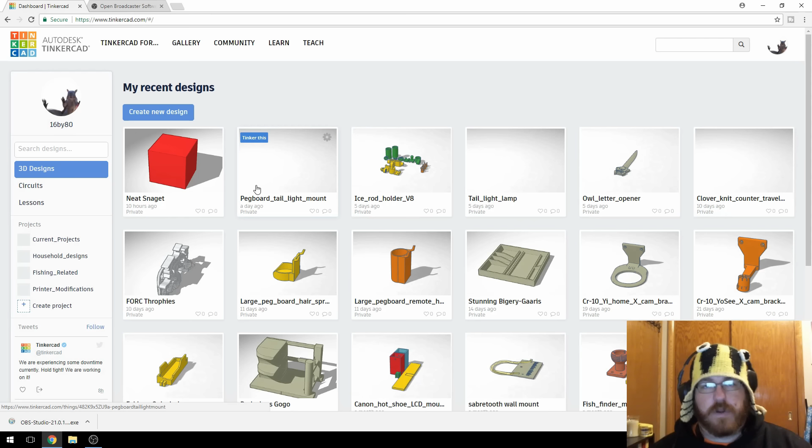What we're first going to do is, I use Fusion 360, but when I started I used TinkerCAD, and I kind of suggest to everybody to use TinkerCAD. It's just easy, it's free, you might as well just use it. You get to set up an account for it, but the account is free, so it doesn't matter. It's through Autodesk, the same company that does Fusion 360 and all that.

So when we get in there, just start a new design. When we're trying to do molds for different things, for me it's for plastisol for making fishing baits, but I guess it applies to anything really that you would need a mold for. This would apply to some other things like CNC as well, if you wanted to make aluminum molds, or aluminium if you're across the pond.

I'm sure there's some limitations to CNC that you would have to take into account that you won't have to do in 3D printing. But there are some in 3D printing that would be a good idea to keep your eye on, to make sure you don't do something that's going to be a little bit more difficult to print and get a good final result with.

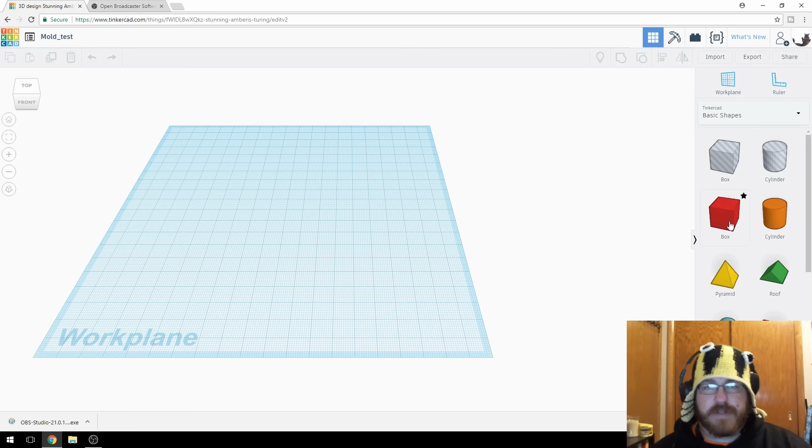In TinkerCAD it always loads with this weird name - it always loads bad in Google Chrome by the way, Firefox seems to be a lot better - so we'll just do like mold test or something. TinkerCAD's a very simple engine, it's just drag and drop, like a Tinker Toy kind of situation, which makes it really, really nice for beginners.

What we're going to do is we want to come up with the design that will eventually be our negative. I don't know really what we want to do here, but I guess we'll just do kind of like a swim bait of some sort.

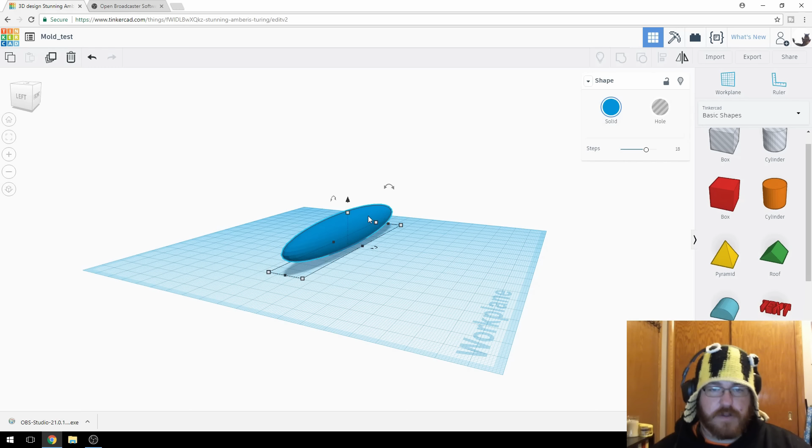So we're just going to bring it in, that'll be kind of like the body. You're just clicking with the left mouse button to drag in, and then you can rotate with the right mouse button. When you click on the object that you have, the dimensional squares come up, and these are all resizing squares, so you can pull it up, pull it down, whatever.

For a swim bait, I'm going to want something like that, probably a little bit - something like that. That's called a fusiform body condition, it's like really elongated, like a fish that's long, similar to a shiner, or fathead minnows, stuff like that.

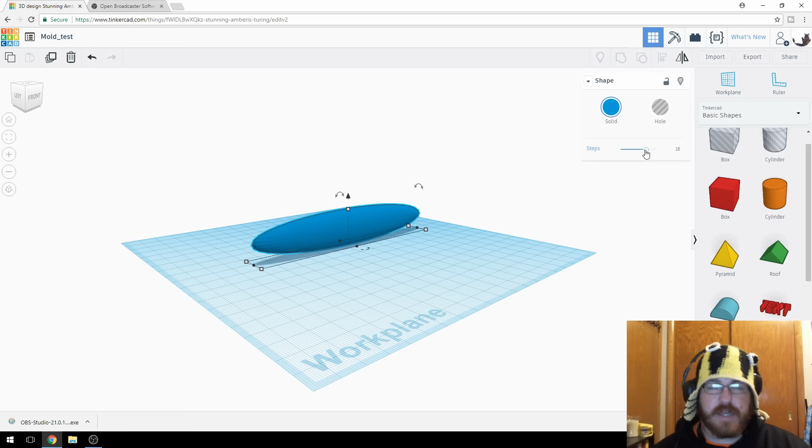Cyprinids, the minnow family. The steps here in TinkerCAD mean how dense the mesh is, so I always just crank that all the way up to 24. You can tell that in TinkerCAD you still get this mesh density isn't very good, it's round but it's not round. It's good enough, especially when you're just starting out, it's good enough.

This all runs through the web browser too, so it's not very hard on the computer. I mean it is a little bit when you get into more technical stuff, like multi-layered, lots of different pieces, but for our purposes right now it should be fine.

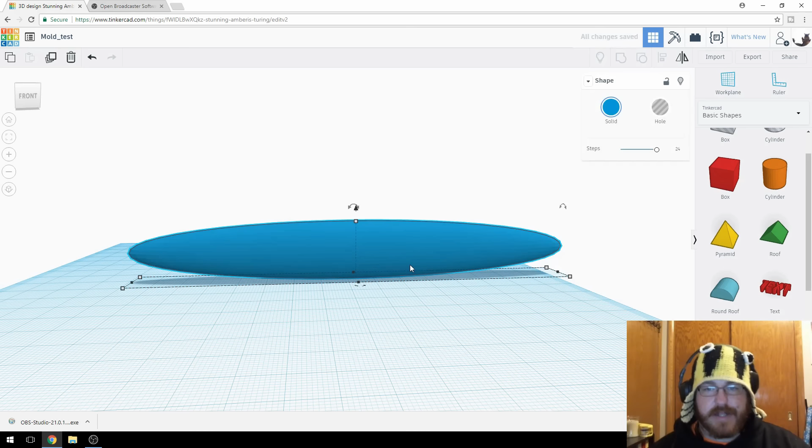So I'm going to drag this out just a little bit more, that should be good. Then I can do a Control D with that selected, and that's going to duplicate it in place. So then I can just move this up a little bit, kind of make almost like a head situation on there.

And then with TinkerCAD we want to group objects, so we can click and drag all the way across, and that's going to grab two shapes. You can see that up here in the upper right hand corner, it says shapes 2.

So we can group those together by hitting the group button here, and then that makes it one object. So now if we want to modify this object together, it's going to pull the front all the way to the back, whatever. So then we have that grouped, and it's a decent body shape.

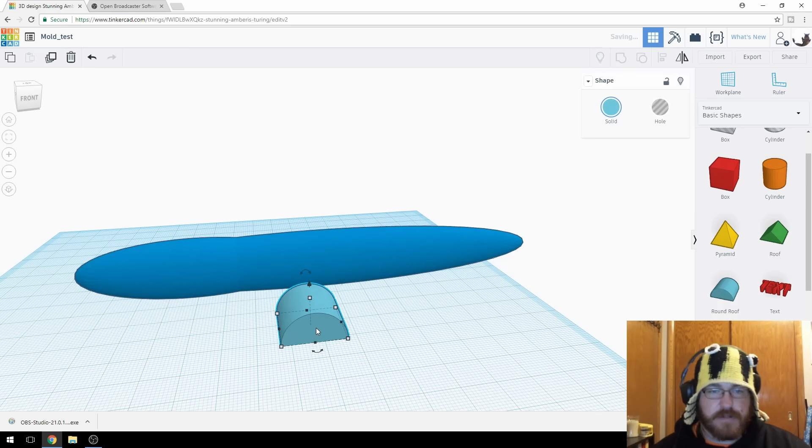So I'm just going to pull in this round. That looks pretty good. I'm just going to do this. I'm going to put a cutout into it.

So I'm just moving the shape around with the right mouse button, trying to get the shape I want, assuming that this light blue - I could change the color of that so this makes more sense.

So the red cylinder, half cylinder - I'm thinking in my head right now that's going to cut that shape, and that's exactly what we're going to do with it, is cut it. So I'm going to go here. I don't mind the look of that. It'll work.

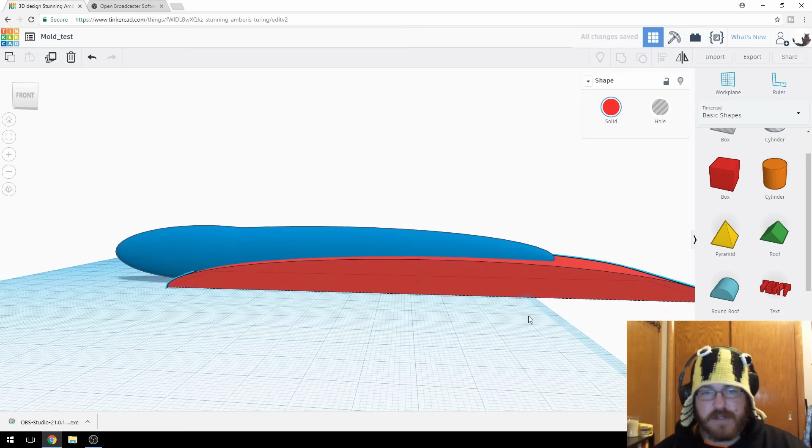Maybe bring this up just a little bit. Maybe down just a little bit. Nah, whatever. Another trick in TinkerCAD - it's not really a trick, a lot of people just don't do it when they first start - is that this is all snapping to a grid in the X, Y, and Z.

So it's all snapping to 1 millimeter. You can tell as I move it up and down, it goes 8, 9, 10, 11, 12. You can go to the snap grid and either turn that off completely, or make it a higher resolution. So we'll go to like 0.1, and you can see it's moving in 1/10 of a millimeter. This helps a lot to get exactly where you want it to go.

I'll just snap it back to 1 millimeter to make life easier. Once you put it back to whatever resolution you want it to snap to, it'll reset and go back to that. It won't just keep going at 0.1.

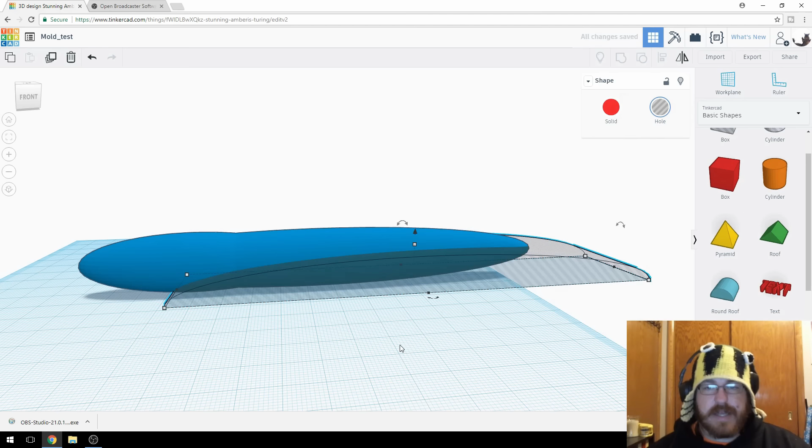It'll snap back. So then we set this to a hole, and that means when we go up into shape and make it a hole, anything that touches is going to be cut - it'll become a hole, right? So then we just group this together, and that cuts the bottom off.

So now we have this kind of weird looking shape that's a little bit different. I don't know what I'm doing really, like this isn't going to be a mold for real, but maybe. Okay, so we have that kind of fusiform shape a little bit there, and then maybe I'd say we could make this kind of like it would have fins off the side here.

So what I'm going to do then is try and find something that would kind of work as a fin. I don't really know what would really work as a fin, but we'll see.

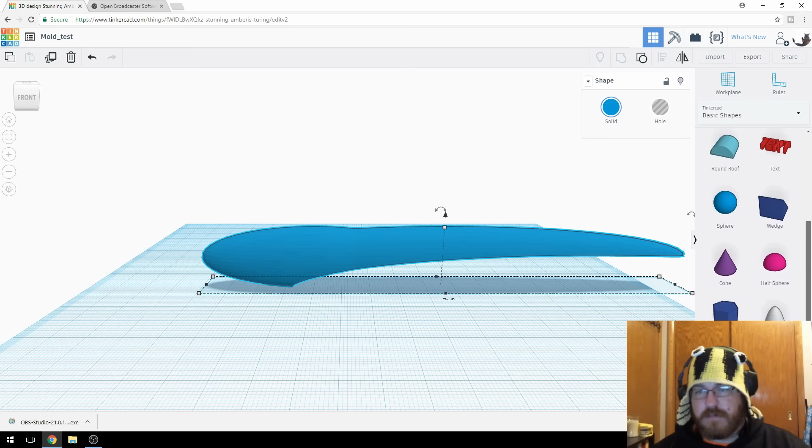What we can do is maybe we'll do another sphere, just because. We'll make the steps all the way up to 24, and I'll make this a different color so we can see what we're doing.

But then I'll go in there and adjust it. If we want this to go separate, if we want it to move, to rotate, all we have to do is click the axis that has what we want the move to be. So you can see these arrows - if I zoom in on this, you can see these arced arrows.

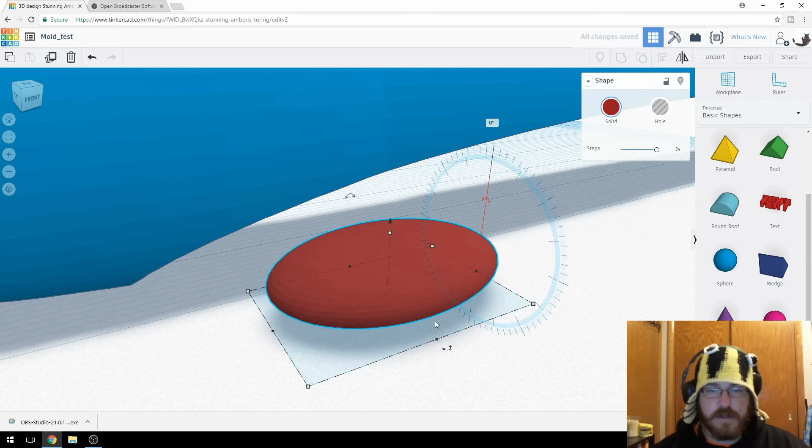So that means if we move this, it's going to rotate in that direction. If we move this, it's going to rotate in that direction. And if we move this, it's going to rotate on this axis, right?

So what I like to do is just make it the size I want. So I'm looking for like a fin, maybe 3 millimeters, nothing crazy. And I want that fin to be offset just a little bit, so 45 degrees.

Then what I'm going to do is duplicate with Control D again. I'm going to bring this over, and then just move this 90. There we go. So now those two are going to meet, right? Because it went 45 one way and then 45 the other way again, so this will meet. And then all I do is just put them in where I want them to be.

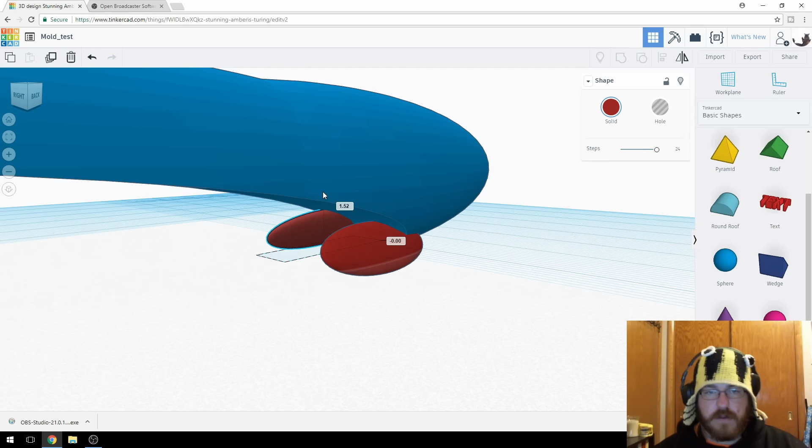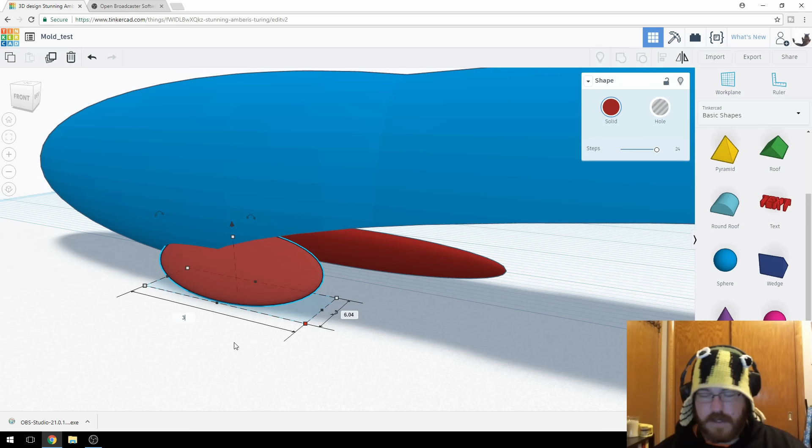So to make sure they align correctly, I'm going to get them to where I want them to be, so they're lined up. Let's pull these out, we'll do like 35. So we click that, and we're doing the length at 35. That makes it larger. That's interesting enough. So you can do an align function, which is kind of nice.

So you click the two shapes, I'm just holding shift down to get to the next shape, then I align it. Let's see, where are we at here? Come on, show up. There it is. So we align it to this side.

And then what we can do is we can go back in, select those two now, and we can align it. Can't do that. Align this side. Those two are aligned. Align this side.

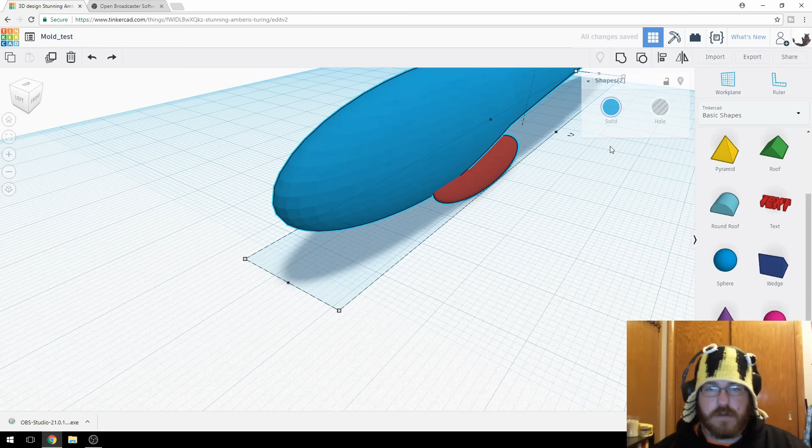They'll step the whole thing over, so sometimes you can get it to work with the smaller one first. So if we do it like this, without screwing up, it'll align. So whichever one you click first is the one that's going to move in the alignment, right? So we want this one to move with respect to the larger. Oh, see, it won't do it either way.

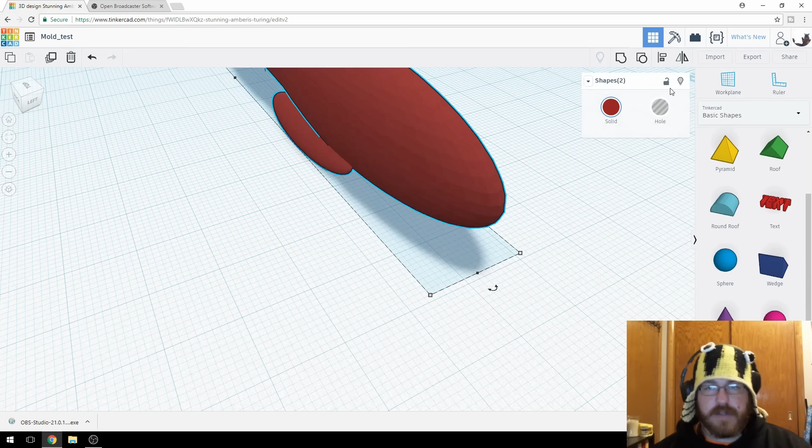This is why, after you learn it a little bit, you want to kind of switch to Fusion 360, because things are quite a bit easier, you don't have to do as many workarounds. But what I'm going to do here is switch over and align these two, then group these two. So now they're grouped together, and then I'm going to align these two, then group those together.

So if you're having this kind of issue with the blackout business with TinkerCAD, I'm pretty sure that's a Chrome issue. So what I'm going to do is move over into Firefox. Yeah, I know it's not my default browser, don't worry about it. Okay, so we'll try it in TinkerCAD and see what happens. I just kind of like how it moves in Firefox anyway, it seems to do a lot better.

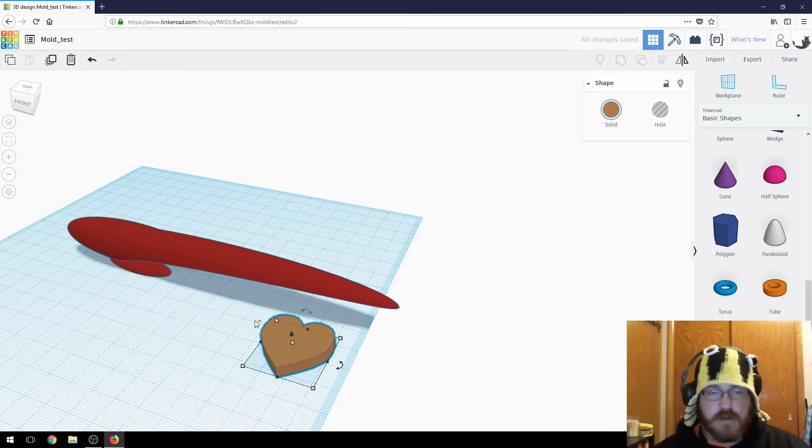So we have this kind of idea here. Let's add a fin to the back. I don't really know what this is, but it seems funny, this heart object in TinkerCAD seems to work pretty well as a rear fin. So I'm just going to move this to 90 degrees, and then I'm going to decide my pitch on here. I'm going to do something like this. Why not?

And then I'm just going to mate it up into here, something like that. Now those two are together, and then we go up and we group them again. And then I'm just going to do a box, because that's what I do.

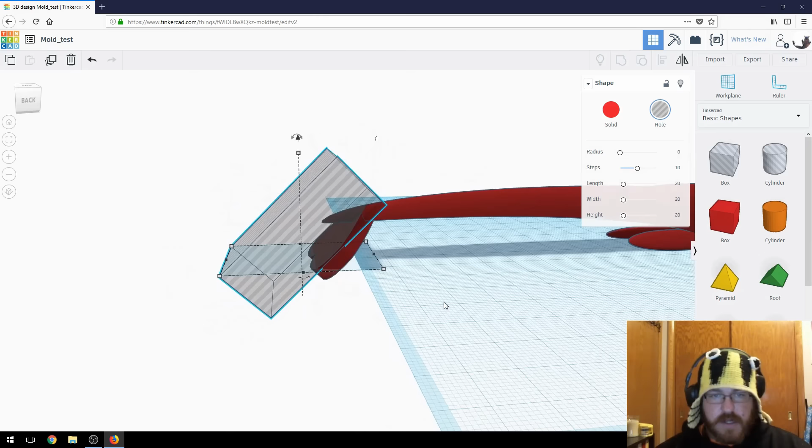And then if I was really smart, I would have remembered what angle I had made the heart, but yeah, I didn't. So to me that looks pretty good, and that's going to cut off that remaining little tail part. So then that's cut off, and we got some weird whale looking thing that would be decently hard to cast, but not impossible.

So then at this point, this is all one object because it's been grouped together. Move that around, I'm going to bring it down to, well, let's see, kind of like that look. This look right there, probably. So it's 108, it's 108 millimeters. Oh, it's okay.

So that's another trick in TinkerCAD. If you're up here and you don't quite know where you're at, this one's always in there, that's always going to tell you the base of your model. So you can just put 0 in there, bring it back to 0. It's not really a trick, but it helps with workflow quite a bit. But then we can bring this down, I don't know, I like the look of that.

So now we have our negative. So I am going to use just a larger box, right? So we're just going to bring this in, just make a box. Something like that's fine, I don't really like red, I like yellow. Yellow seems to show shadows a lot better, so that's what I use quite a bit. I want this a little bit thinner. There we go.

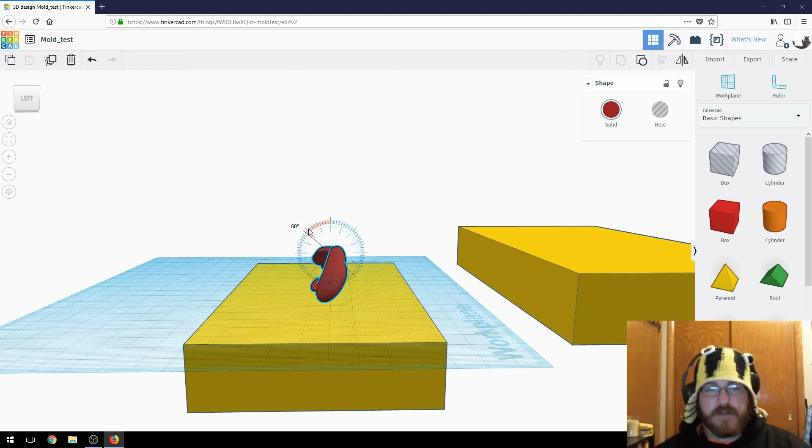So you just go back up to the function for 90. It's kind of nice in TinkerCAD too - you stay to the inside dash marks and it moves it for you a set amount, in this case 22.5. But as you go out, you can go to individual 1 degree increments, and if you go all the way out, you get a lot better control on where you want to set that.

But we're just going to go to 90 degrees from the build plate, and then we're going to duplicate this again just to have it. Duplicate it over here, so anything we do now in the future, we have that extra model sitting over there in case we mess something up.

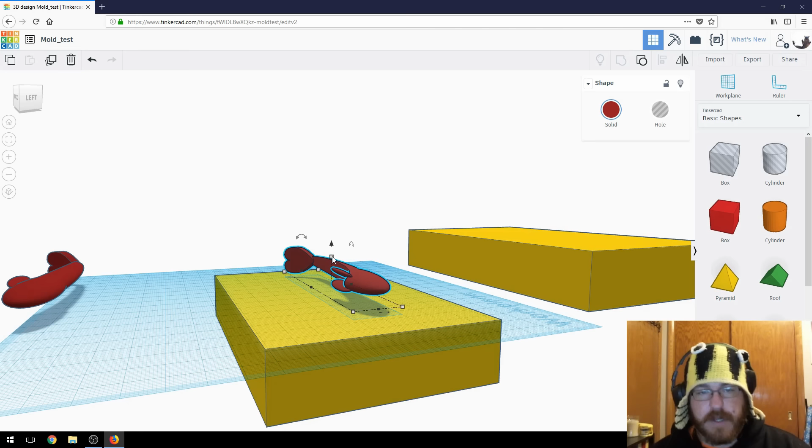So then we're going to go and look at how tall this is. So it's 15.31 millimeters tall. And just for the ease of this, this model doesn't have to be exact, right? So I'm just going to make it 16. So it's 16 millimeters wide for the swim bait, but 16 millimeters tall in this scenario.

So what we're going to do is we're just going to grab this, go to how far it is off the work plane, and we're going to put in -8, because that's half of 16. So now we know that the model we have is sitting halfway in there, right? So we have that in there where we want it.

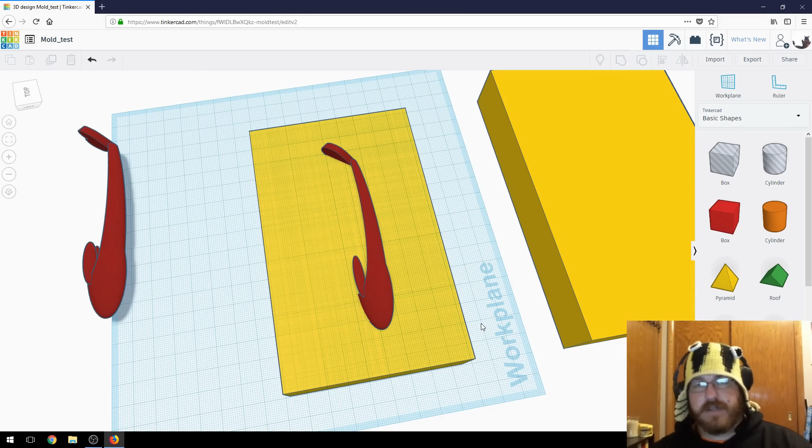Now what we have to do is add pour holes and the holes to escape, let either gases escape or steam escape in the case of plastisol. So we're going to go in and we're going to add those.

And with this mold, I would pour from the top, I would think, probably just straight off of here, off of the front. So all I'm going to do is make my sprue holes, and they're just going to be whatever. I don't even, you get the idea. Like, we're not going to actually pour this thing, but you get the idea.

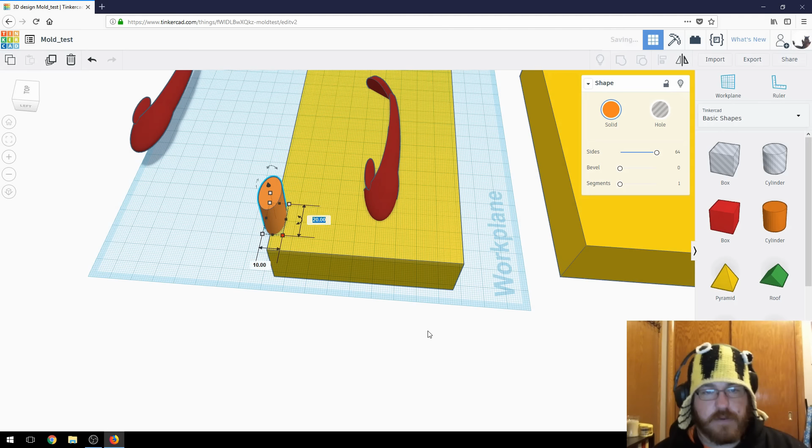You want the sprue hole big enough to accept the inlet of your injector, but you also want the sprue hole small enough to where you're not going to be over injecting plastisol.

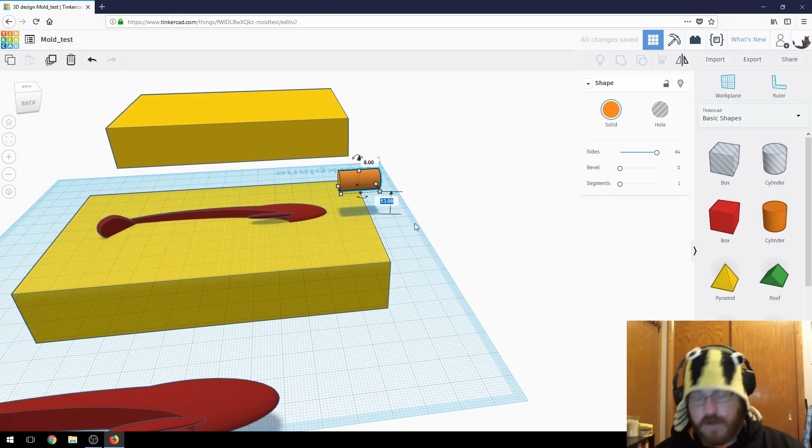So we're just going to bring it in, 10 millimeters, seems fine. I'm going to go in here. So if it's at 10 millimeters, we want it at -5, and that'll put it halfway in between that mold.

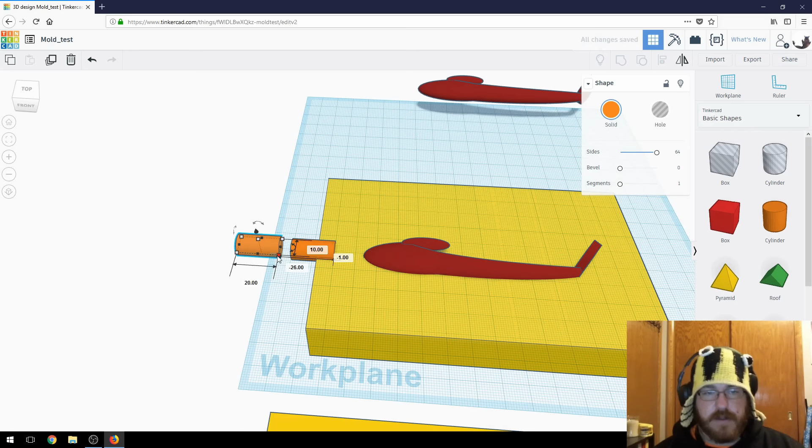And then we're just, let's see, we can stage this as well, right? So we have this one, we're going to Control D, we've copied it, and then I'm going to go in there and adjust this to, I don't know, let's say 6 millimeters and 6 millimeters. So that way this is now 6 millimeters instead.

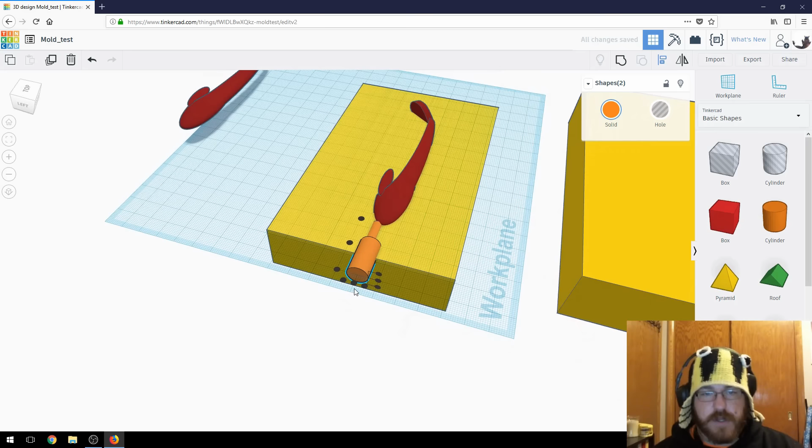And then we're going to do our align tool. We're going to align those two together. We're going to click. We've selected 3 shapes here. We can see that's the big base, and then also these two. So we just hold shift down and we click off the base, and then we can group these together.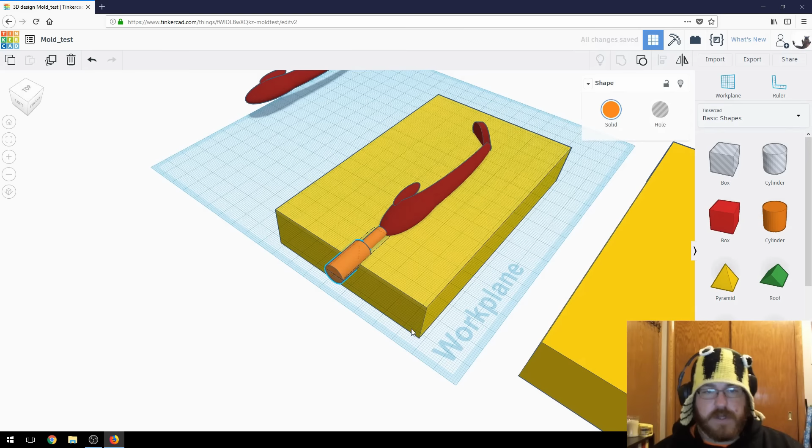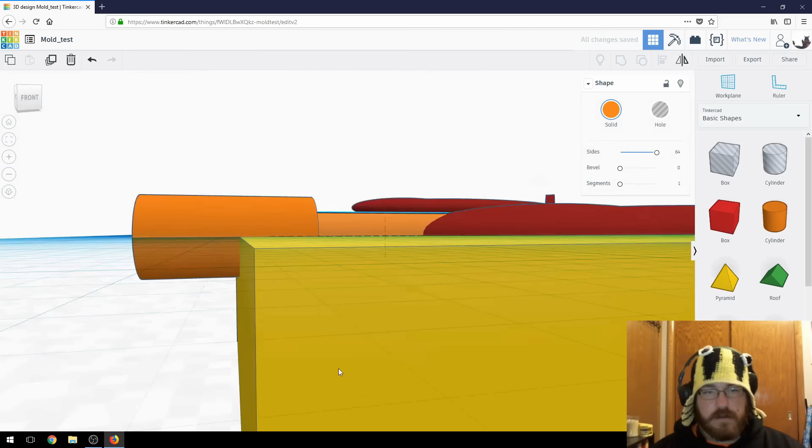And then I'm just going to align it per however I think is fitting for this to align. So ideally what you would do is you would bring this all the way in, right? So like that. And then I regroup them.

Okay, so now we have our actual pour hole. So now we need maybe like a sprue somewhere, definitely off of the tail, right? We're definitely going to need one off of the tail here. So I'd probably do one just straight out.

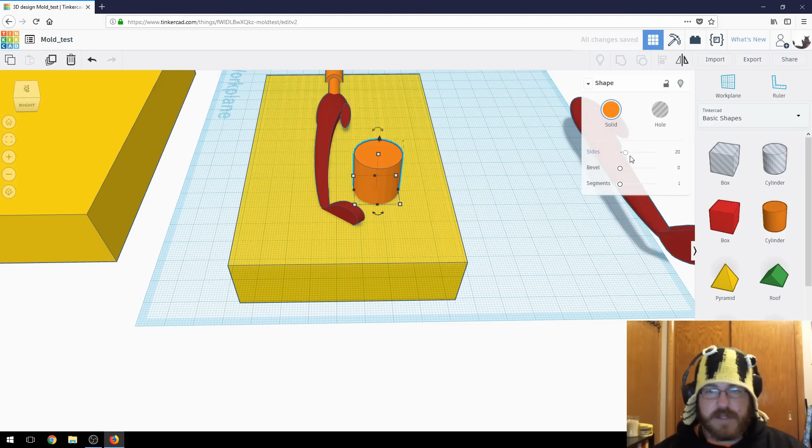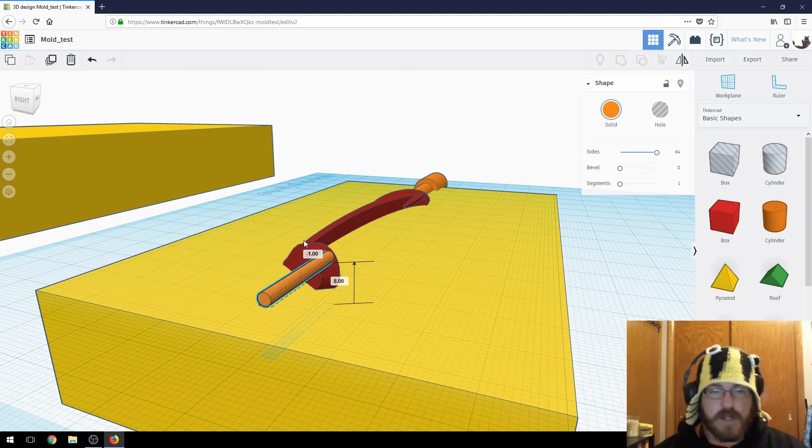So we'll bring this in again, and we'll just make this one really small, 2 millimeters, probably all we're going to need. Then we go in and we grab this. So if we're at 2 millimeters, we want to bring it down to -1. Okay, it's pretty easy.

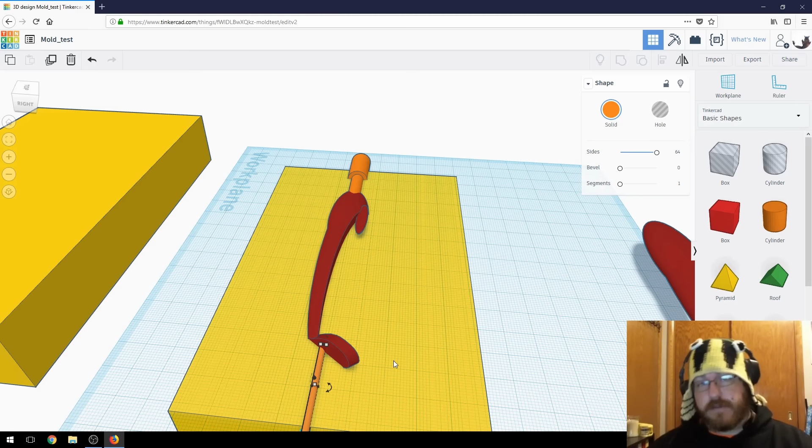Then we're just going to bring that out. Set. Okay, so, I mean, you can get as complicated or as simple with this as you want, right? It's very simple after you start recognizing, like, oh, this is rather easy. But so if this is the mold that we're going to try, and honestly I would have one coming out of here as well.

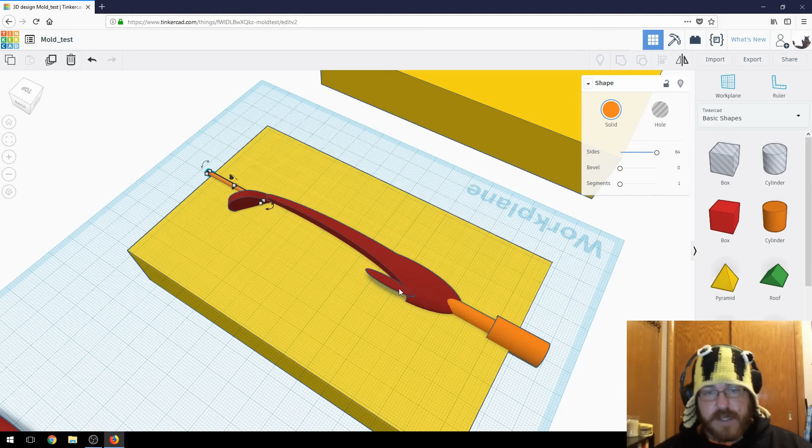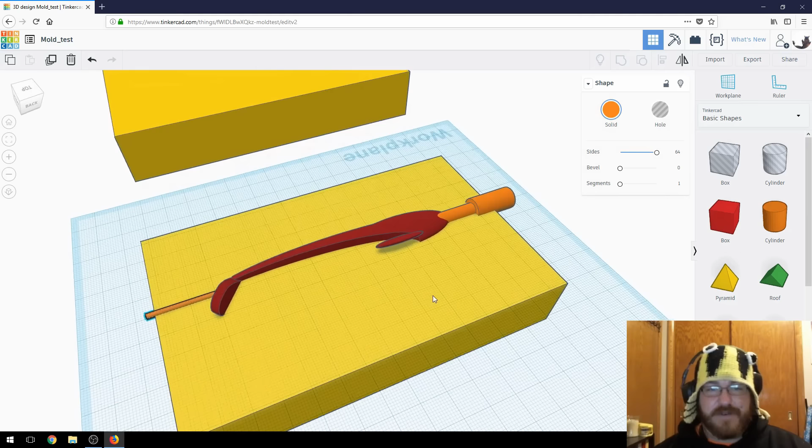Maybe, it might push it through. If you're injection molding, it'll push it to the end of this fin. If you're pouring, like tin or pewter or lead, I would add additional vent holes, or it won't go through there, I guess. I don't know, you could try it.

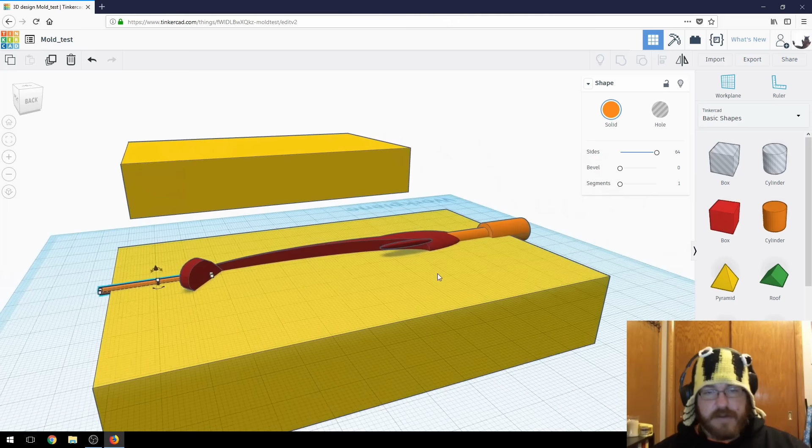The problem with this now that I didn't recognize earlier is that we can't have this in a two-part mold, or this is going to come up. For instance, when this mold comes apart from each other, this fin's going to go with it. So that was a bad design on my part.

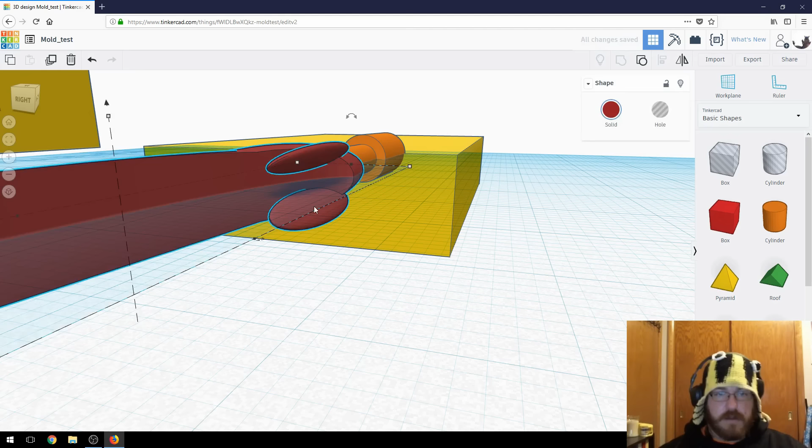But we can go back in and fix that. Instead of having it on two separate sides, what we can do is go in there, ungroup again, ungroup it all the way. What is going on?

There we go. Just for the ease of this demonstration, I'm just going to get rid of this one, and we're just going to go something like this.

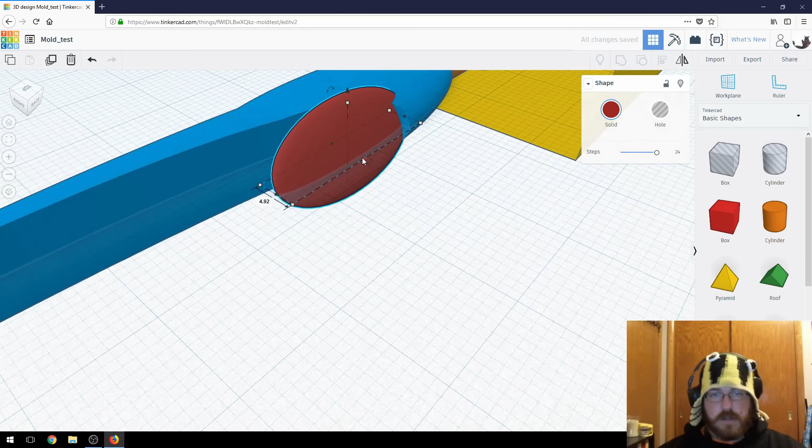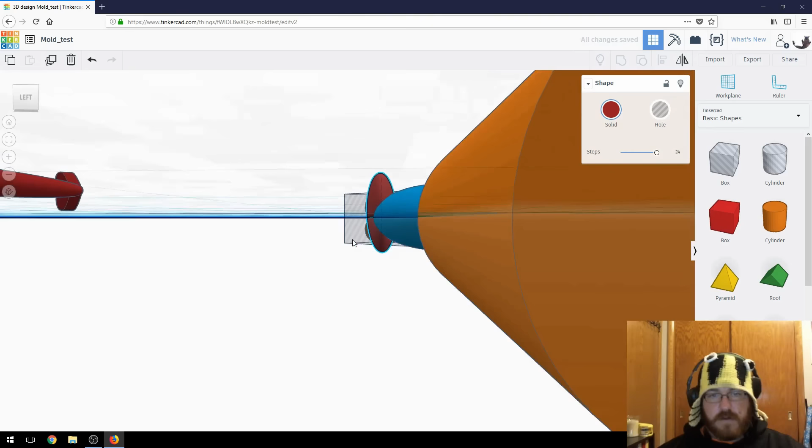I don't really know what that is, but a fish might bite that. Fish are pretty stupid, they bite random stuff all the time. Good enough for the purpose of this, I'm okay with that.

So then I will get everything centered again, and I'll group it.

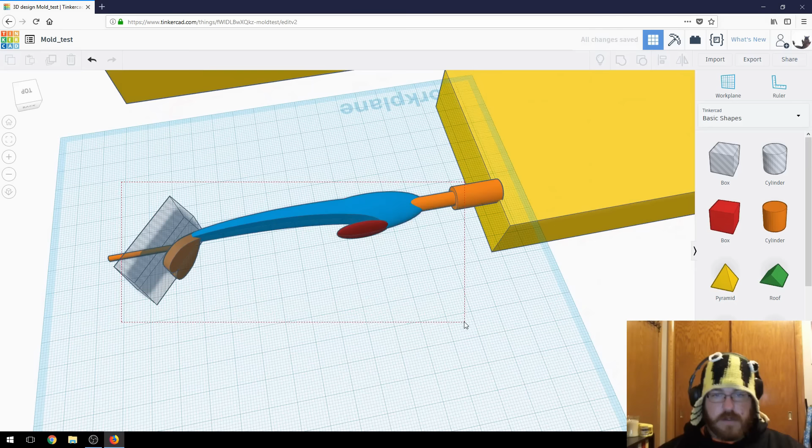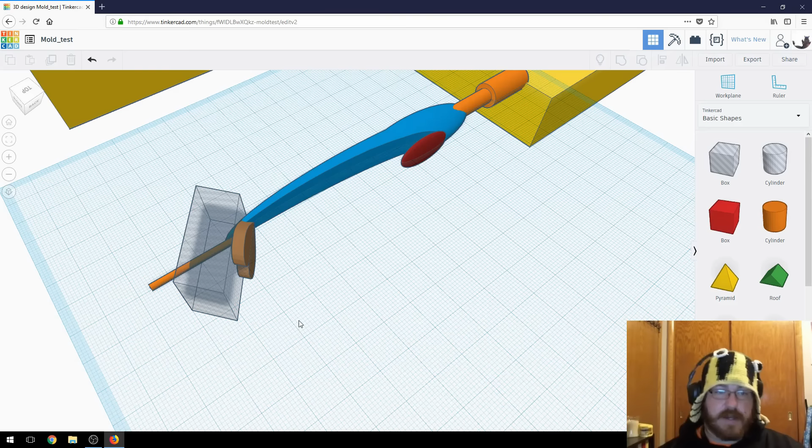Really? That's the problem you run into as well. The order of operations you do Tinkercad in is also another reason why Tinkercad's not a lot of fun, but it works and it's free.

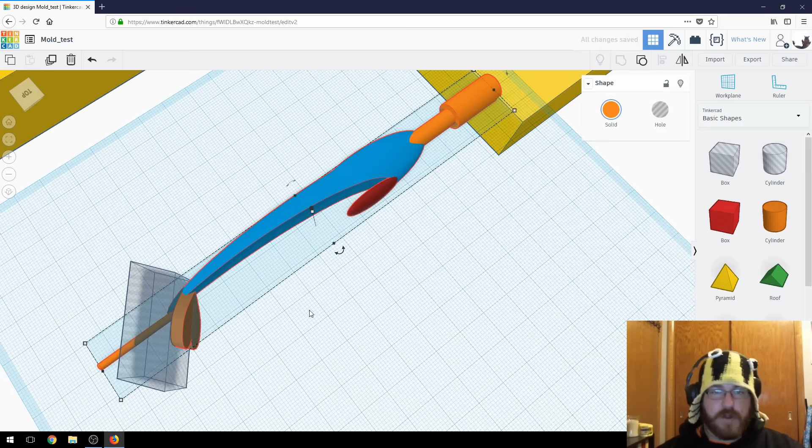So you have to group all the things you want to group individually. I'm holding shift down and selecting the ones I want to group, because I don't want to group the negative yet, or what's going to cut yet. So I go back in, group all those together, then come back through and group the cut.

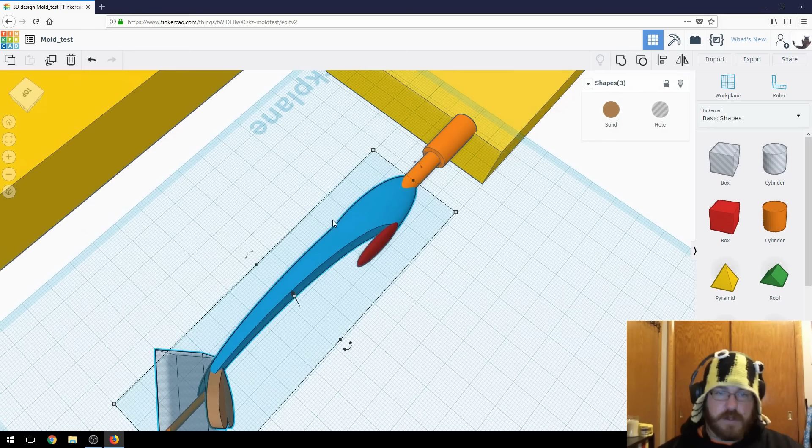That was a lie, screwed that one up too. Okay, you go through and group everything you want to group. I want the cut grouped, I want this, and I want that grouped, so I group all those.

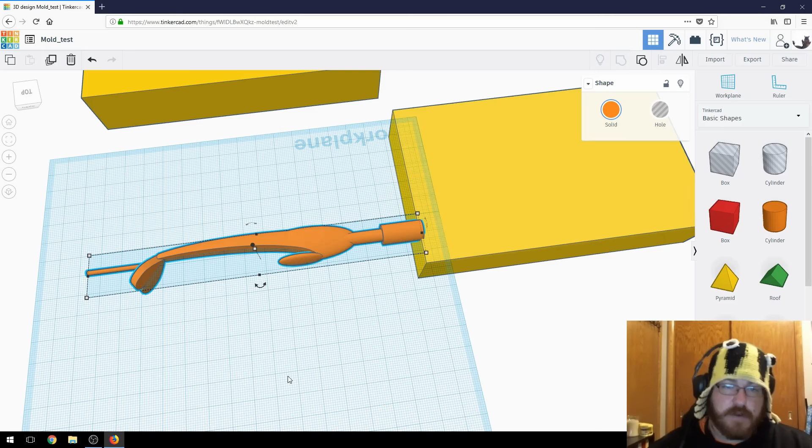Now I can group this and this together, because that's our sprue hole, that's what we want grouped. So now we have our pour hole, and we have our sprue holes, and then we have our base that we can put in wherever we had it before.

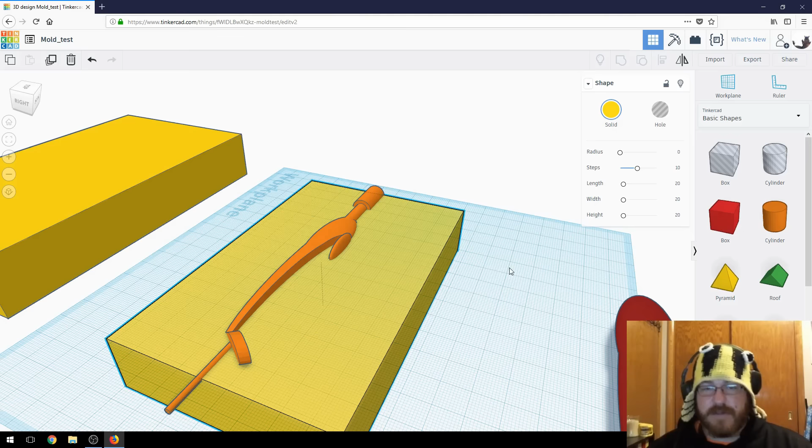Now, this is a little bit of the trickier part, is you want index holes to allow putting both molds together. It's a little tricky to do in TinkerCAD, but not impossibly tricky, just a little bit tricky. So we'll walk through that real quick.

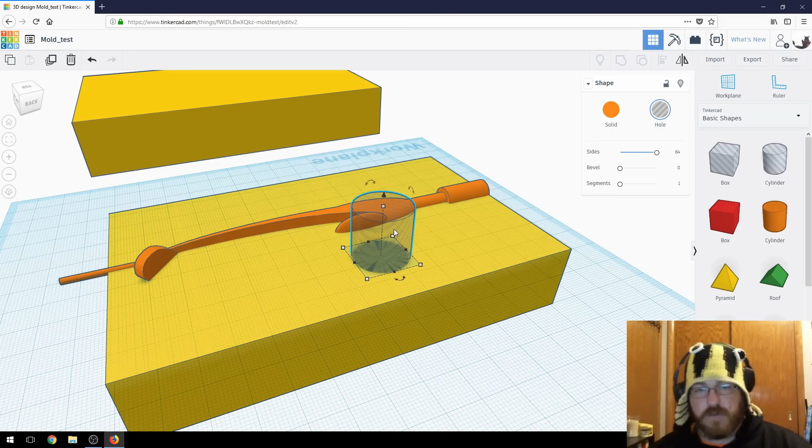So you just want one cylinder, large. For the purpose of this demonstration, we'll make large index holes, right, so we'll do four of them. Control D, control D, that probably showed up somewhere weird.

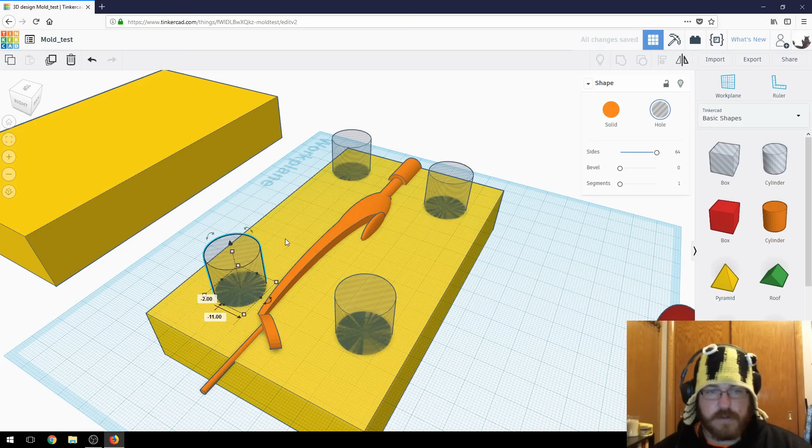Control D. Okay, and we'll just put them in goofy, random, whatever. It's there, there, there, that looks good. Okay, so this is going to be our index locations.

But what we have to do is, because TinkerCAD is going to want recesses in one and spikes in the other, we're going to have to kind of do this twice. So we're going to put these holes down.

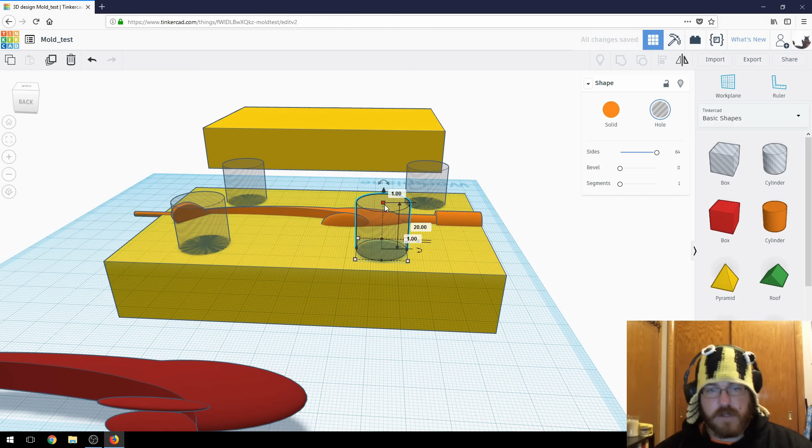I'd say, I don't know, where did they go? How tall are they? 20. So we'll put these just down -10, because that just makes life easier. So they're down -10, so now what we have to do is bring in a cylinder that's slightly smaller.

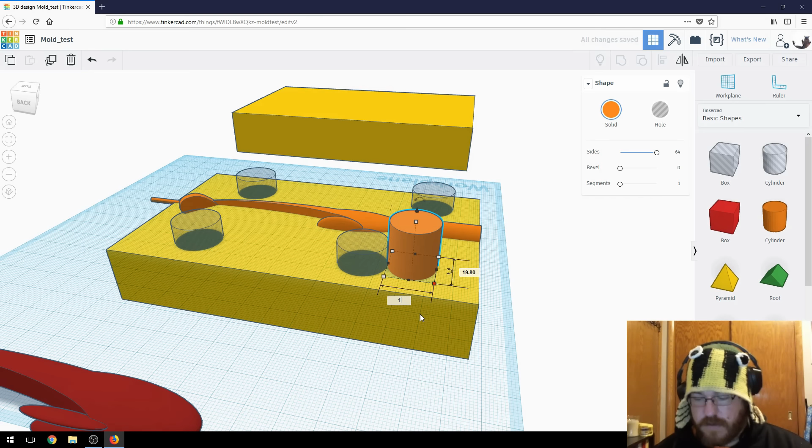Than those, so that's too big even. So 19.8 millimeters, 19.8 millimeters, because the diameter of these larger holes is 20 millimeters.

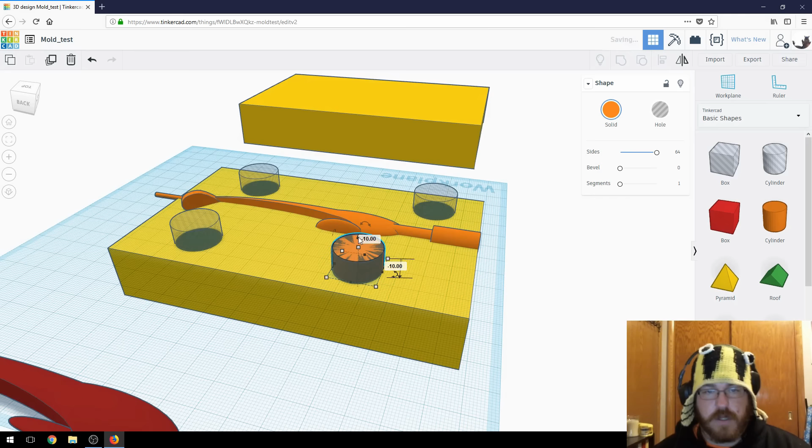So what we're going to do is just match those up with this. So we're going to bring that down to -10, and I'm going to duplicate that. I'm just going to bring them all the way out here. You can do this all as one mass as well if you want to, but I'm just doing it like this.

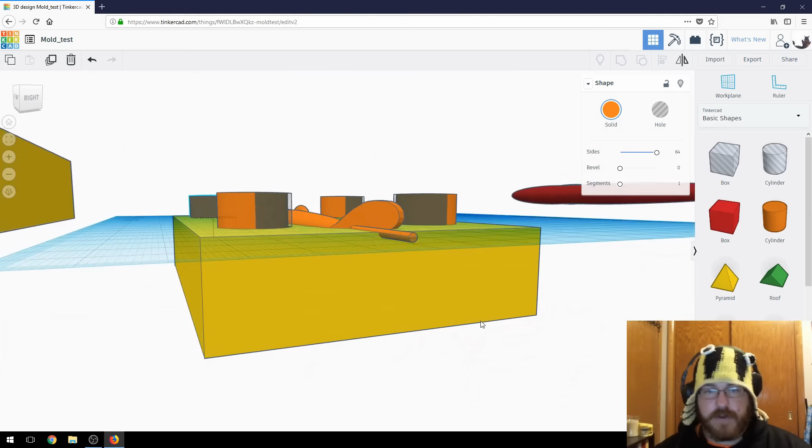So then you find an area where you can select both of these. Then we're going to do the align on these, we're going to center them. So now it's centered on the X and centered on the Y, and they're already centered on the Z.

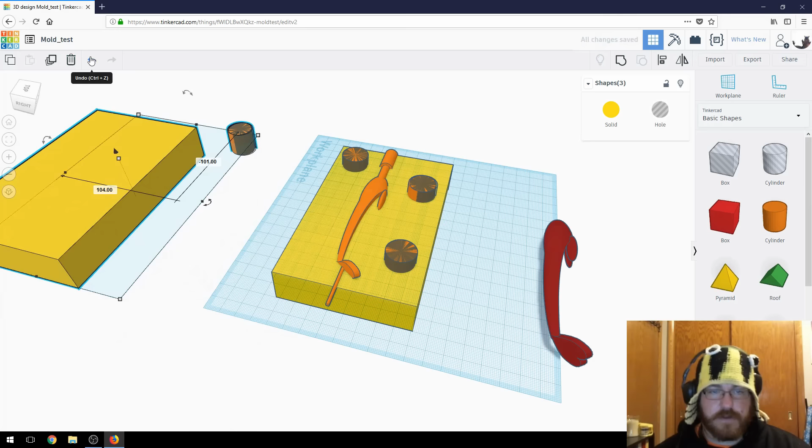So we're going to do it for this one as well. Not that, we're going to do it for this. Stop selecting that. Stop selecting that. Stop selecting that. Okay, that's just frustrating, that's frustrating is what that is.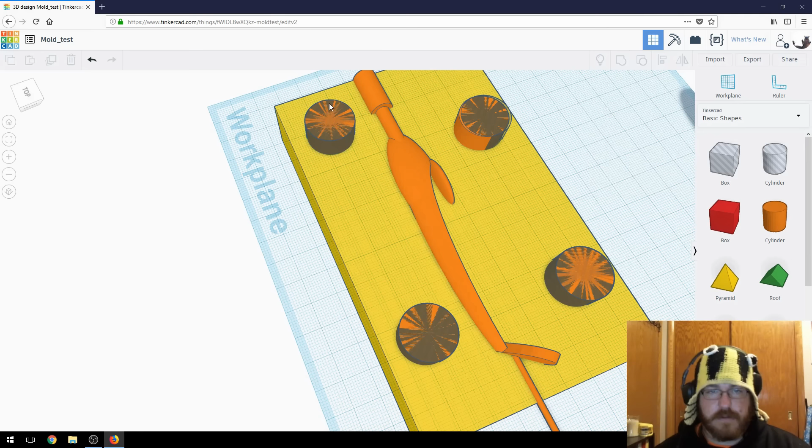Okay, I'm just going to go through and select them with shift. We'll go through, now we're just lining them up, that's all we're doing. So I'll select all three. I know I've selected those two cylinders, but I also selected the bottom, so I held shift down to get rid of it.

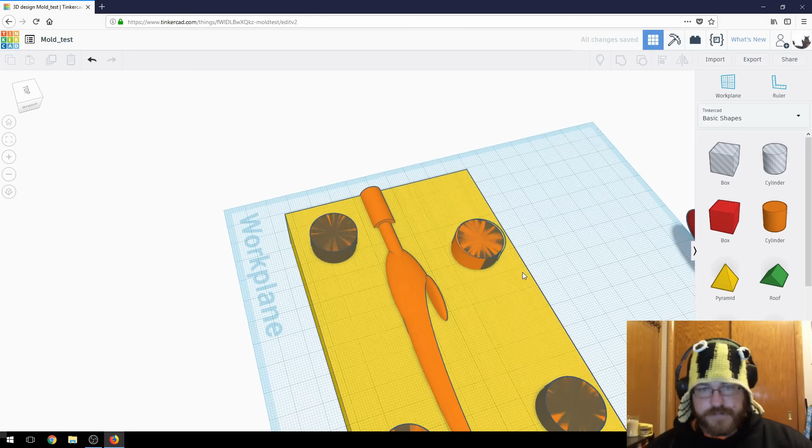Yeah, did that again too.

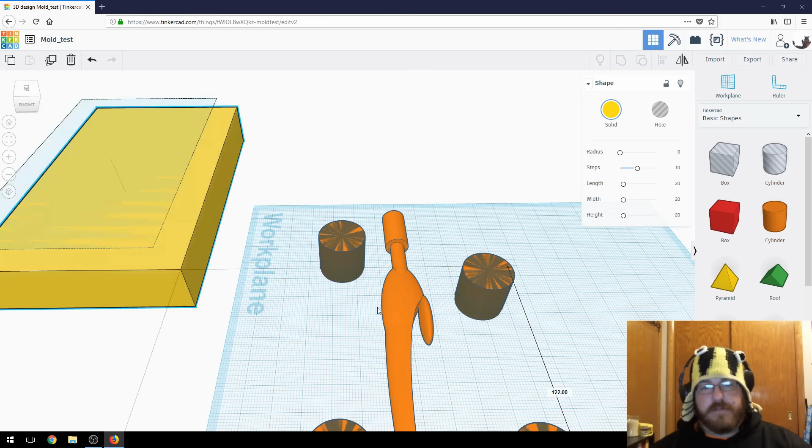So what you can do is model the inner part of the mold without this section on the bottom, but I just like doing it with it on there so I can get an idea of where it is. Now what we have going on here is the index holes with the spikes for the indices in place, stuck in place in the mold.

So that allows us to add it to one side and not the other. What we have to do in Tinkercad, because we're going to make two sides of the mold, is make essentially doubles of the things we need on each side of the mold.

And that's going to be our model in the middle. So we're just going to click it somehow. Let's get there. Okay, so we're going to make it a hole because we want it negative.

And then I'm just going to do a Control D. It's copied. Now you can't see it, but it's copied on there, it's on top of the other one. So then I'm just going to bring this one over, and we're going to match it up on top. This is why snap to grid is really helpful, because it will snap right there.

And then I like to just do this as transparent so I can see what's going on in there. So for this one, what we're going to do, ideally, is have this one have the actual posts for the indices.

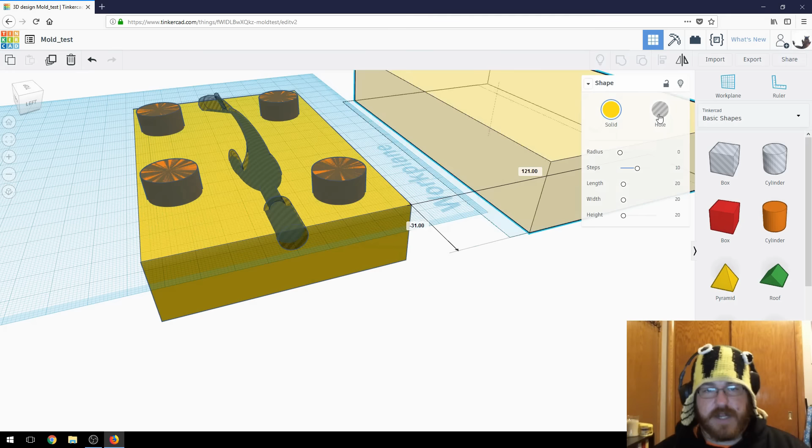So what I'm going to do first for this one is we're going to wait on it, and this one's going to have the negatives. So all I'm going to do is click this, shift with this, shift with this, shift, shift. Okay, so now I have all 6 of those objects.

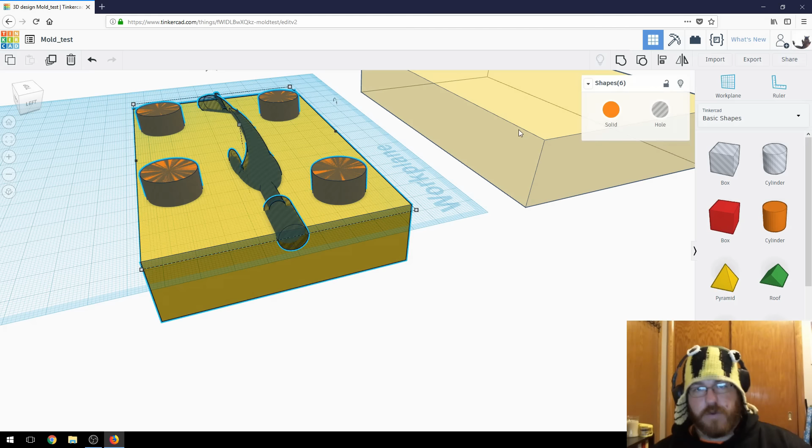What I have is the negative of the model, the negative of the indices, the holes themselves, and then I'm going to select the bottom half of the mold. And when I group this, now it's grouped, I can actually remove this one, and we have the negative of what we want the mold to be with the index holes, okay?

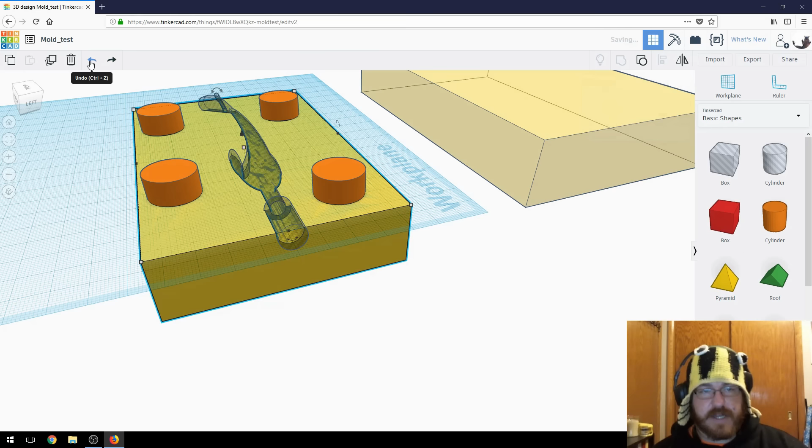But I'm going to keep that in place for a second, because now I'm going to put my next half on it, so this is going to have the posts inside, okay? So I'm going to put that in there, and then what I'm going to do is remove the bottom.

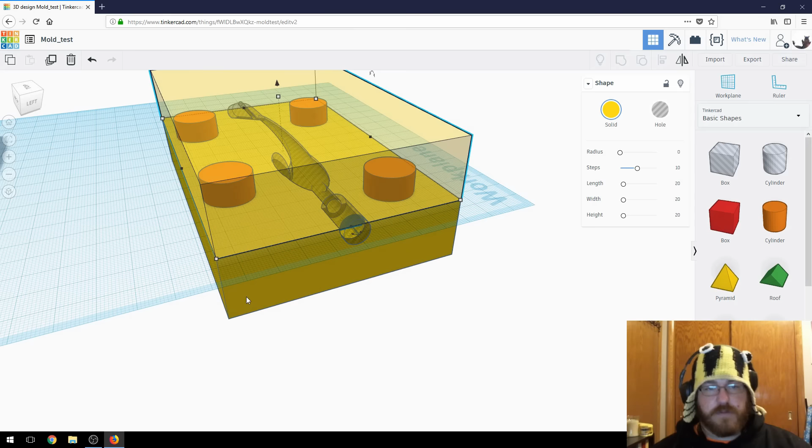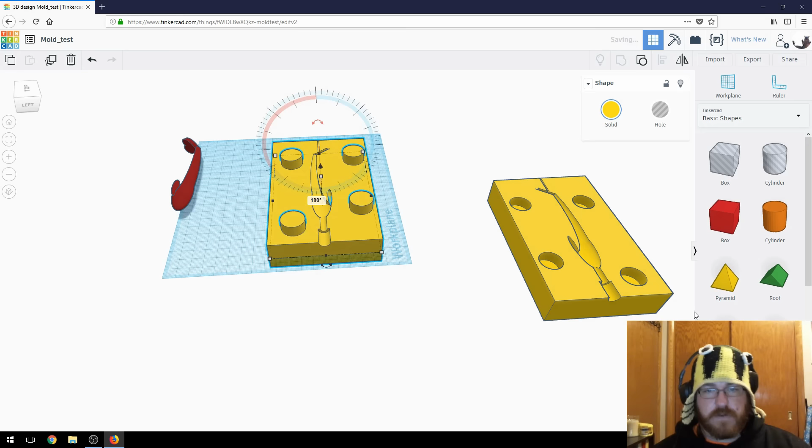I'm going to set this back to non-transparent, and then just group this one. Okay, and then we'll flip it over. If it would work out, I'll flip it over. There. And then move—what I can do is probably put all this to 0 so it actually looks better.

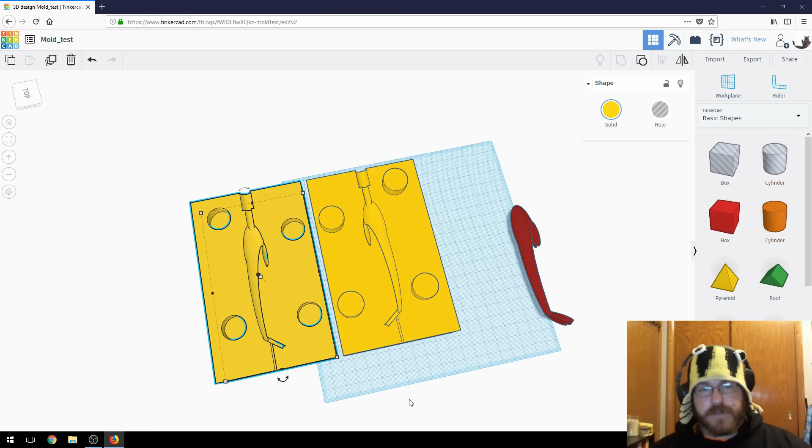Okay, so now what we have is a 2-part mold with index holes in it, so you can put them together quick, with a sprue hole and some vent holes, or a pour hole and a sprue hole. So you can apply this pretty much to anything that you want to do.

It's really, really nice to have a mold that actually indexes into itself, instead of trying to line it up and have it work.

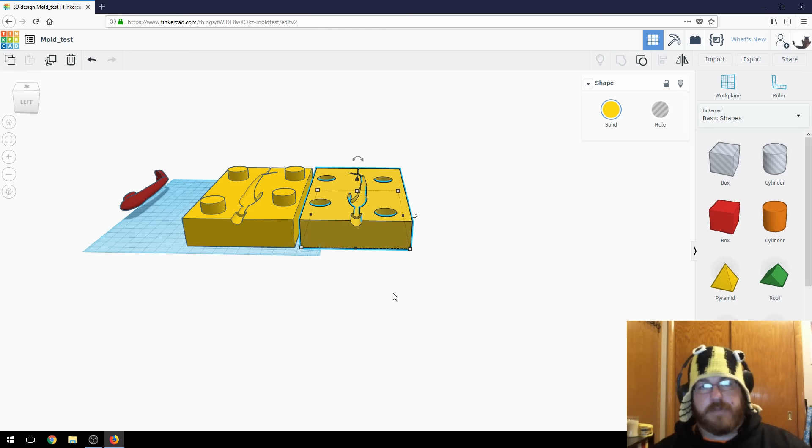As far as my experience so far with trying to pour molds with plastisol into 3D printing, the reason I tried to start doing it is because I saw people online doing it, or at least attempting to. I don't quite know how they're doing it, because I ran it with PETG, and my plastisol was too hot for the PETG. It just warped and bent. So maybe if you're printing ABS, something like that.

I'm gonna try it again. Probably do a coat of epoxy on the inside of the 3D print and see if that works. But hopefully you enjoyed this.

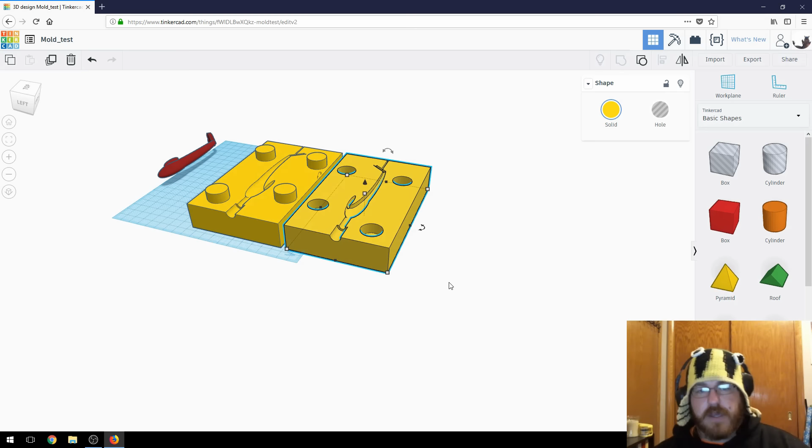This is real quick. This is Tinkercad, right? It is not super complex software. There's much better ways to do this. I'm sure if you know, just drop it down in the comments below, some better ways.